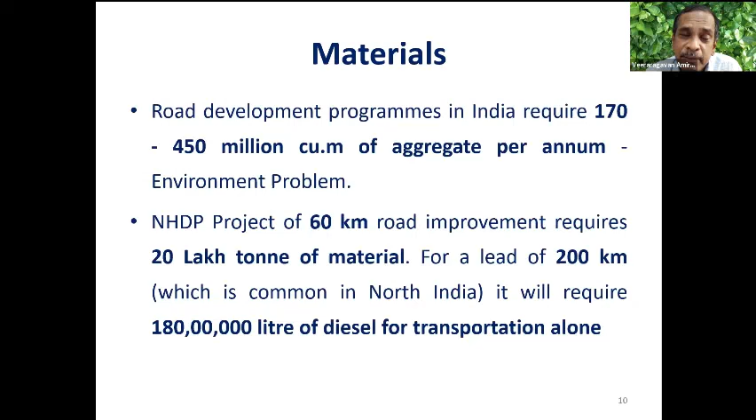Then you have to add both costs to work out the cost of the structure. There lies the major problem. What are sustainable pavements here? Sustainable in the system, in respect of pavement, refers to a system wherein you should be able to cater to the demands of the traffic above the desired serviceability level. What is the serviceability? What is that you want?

If you ask me, you will say, I want a good riding surface. You should be comfortable. It should be safe. That's all you will tell. You will not tell whether I need a bituminous pavement, a concrete pavement, or composite pavement. What we need as a performance is that quantified in terms of riding quality, in terms of safety, in terms of comfort. That's all finally we look at it.

But this requirement is not only for the day you open the road to traffic, but for our design life, which can be 15 years, 20 years, or 30 years. When I want this pavement to last for 15 to 20 to 30 years, will it last?

There's a difference in pavement engineering, which you have to understand, between any other structure. A structure may last for 100 years. A bridge may last for 100 years. But will a pavement last for 100 years? Never. Why? Because of several complications involved in materials, design, construction, operation, maintenance, and management.

I think the pavement is one which is abused by all road users. In spite of the fact that it's being used, overused by different vehicles, it has to give a smooth riding surface. How to do that? What are the different parameters that influence the performance?

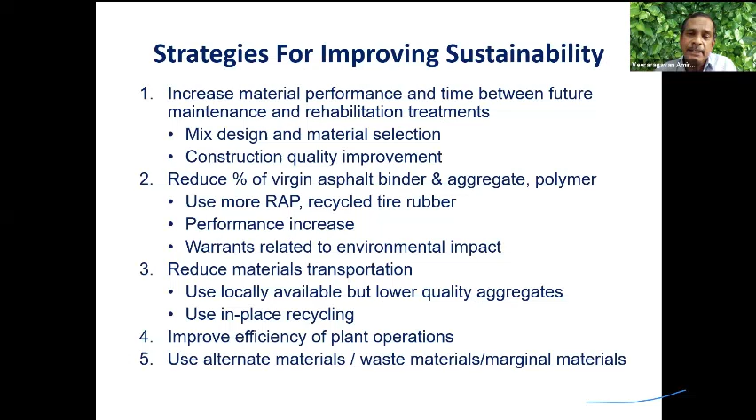There is a need for bringing in new machinery, new equipment. There are large quantities of waste materials available, alternate materials available, marginal materials available. I think it's time that we look at all this material when we talk about sustainability, and always make sure that the pavement performance is not compromised in any case.

I can claim that I have used waste plastics in road construction. I can say that I have used fly ash. I can say I have used steel slag. I can say that I have used polymer. But will it guarantee you satisfactory performance? That is the million dollar question that has to be answered.

If you are a designer, will you stand guarantee with the contractor saying that your design will work? We may or may not be. That's where we are at the crossroads today.

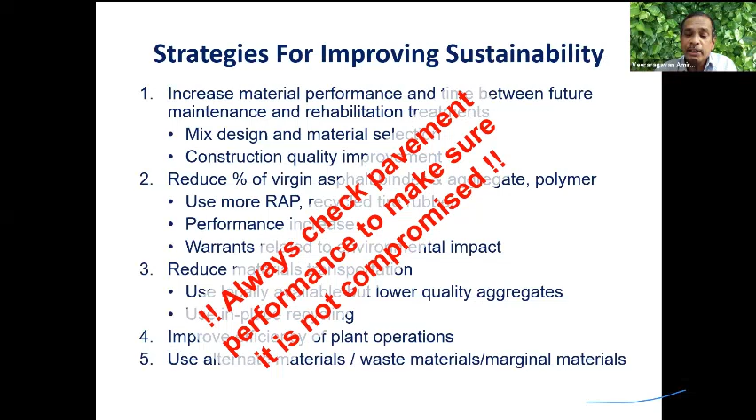So sustainable road infrastructure should consider stabilize and upgrade. For example, I feel that should be the order of the day. Any soil can be stabilized. Will improved soils upgrade improve the performance?

Yes. Will it reduce the thickness? Yes. Will it reduce the maintenance cost? Yes. Then why are you not doing it? It's not mandatory, but again, when you talk about sustainable infrastructure, it's time that we look at soil stabilization.

It can be mechanical, it can be chemical, it can be used as any other stabilizer. Naturally occurring stabilizers are also possible.

Second, when you talk about bituminous pavement, the pavement is subjected to repeated application and a lot of fatigue effect. This pavement should not develop a crack. How to make it more elastic?

If it's more elastic and subjected to repeated load, there will be rutting forming. At the same time, if you make it stiff, it will crack. So how to balance between rutting and cracking is another issue that has to be ensured.

Thirdly, what we find is that most of the pavements constructed in the last 20 years, when exposed to atmosphere, the volatile matter in the bitumen will evaporate, the material will become hard, stiff, and start developing cracks. Once cracks develop, water will enter. Water is enemy number 1, enemy number 2, enemy number 3.

Once the water enters into the pavement, it will strip out the material, lower the strength of the bottom layers, and cause several deformation, deterioration, and rutting of the pavement. We can also use new materials like foamed bitumen and emulsion, which are environmentally friendly. We can use reclaimed asphalt pavement materials.

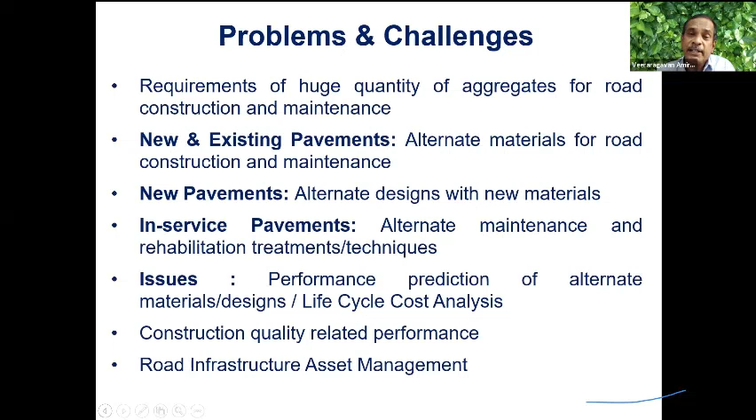How do we do it? That's the question. To start with the new material, the pavement that we are constructing can either be a bituminous pavement, or it can be composite pavement, or it can be concrete pavement. I posed a question. When I want to construct an expressway between Chennai and Bangalore, should it be a bituminous pavement? Should it be a composite pavement or an inverted pavement? I will show what it is. Or should it be a concrete pavement?

So today, in the present scenario, what we do is that any agency for that matter, either Karnataka Road Development Corporation or PWD or National Highways or State Highways, they will tender it. I want to construct a road. There are contractors who bid for the work. Whoever quotes the lowest, L1, will be awarded the work.

The question which I'm posing at this point of time is, is that sustainable? How many years will it last? If I want to have a design life of 30 years, how many times the pavement has to be maintained? What is the maintenance cost? Do we have a material for the maintenance? These are other questions that are to be answered.

There are several factors that are to be considered, like engineering factors, material availability, equipment availability. You have to work out the life cycle cost of alternate designs and take sustainability into consideration. But unfortunately, in the present system of awarding tenders, we don't consider the issue of sustainability.

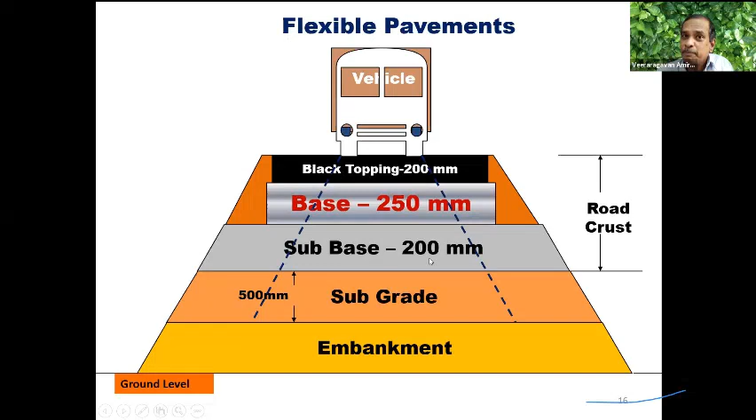Again, this base course costs 250. Can I reduce it? Yes, you can. Sub-base costs 200. Can you reduce it? Yes, I can. That is where sustainability comes into picture. That's where your challenge starts.

What should be the design? The basic principle of pavement design is that we talk about the vertical compressive strain on top of the subgrade, and the radial tensile strain at the bottom of the bituminous layer. This causes bottom-up cracking, the fatigue crack, and this results in rutting of the pavement when it becomes excessive. In a nutshell, your design should be such that this strain value should be within the allowable limit during the entire design life so that cracks do not form, and this vertical compressive strain should be within the allowable limit so that no rutting will form.

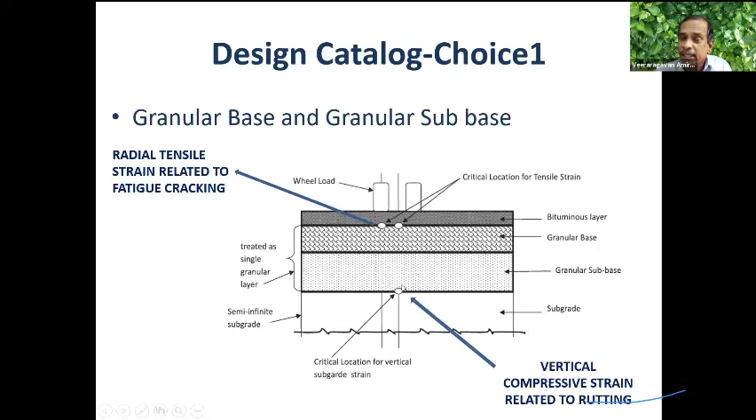How to do that? What are the alternate designs? Normally we require about 200 millimeter of granular sub-base, 250 millimeter of a base course, and 200 millimeter of a bituminous layer. When you have these layers in a pavement system, instead of reducing the thickness, I can have a cement treated base. In the earlier case, I talked about a granular base. Now I have a cement treated base. You can find the thickness of the bituminous layer come down from 200 millimeter to 50 to 75.

We express the traffic in terms of million standard axles in the pavement design. A highly traveled highway can carry up to 150, 200, 300 million standard axles during the design life of 15 years.

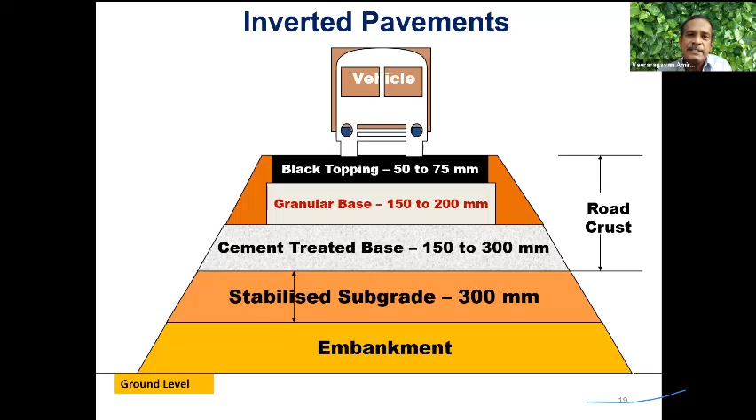But majority of the roads in the country do not carry 150 million standard axles. When I want to construct a pavement, I want to ensure that the maintenance requirements are minimum and performance is good. That is possible by adopting this inverted pavement or a composite pavement.

So what we thought is in the IRC 37, we introduced new choice designs with a new design where I introduce a cement treated sub base and a cement treated base.

At the same time, as a civil engineer, you should know the problem, and you should also know the solution. What is the problem? Any cementitious layer, I'm calling it cementitious layer, is likely to crack. When this layer cracks, the crack will propagate to the upper layers.

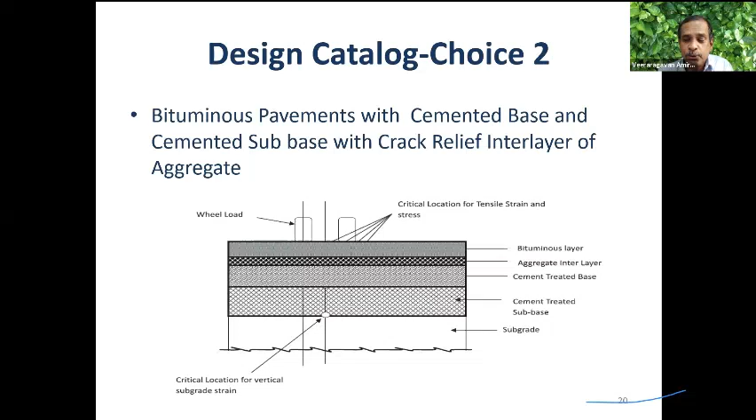Due to repeated application of loads, one truck may be 8 tons, next may be 10 tons, third may be 20 tons, fourth may be 30 tons, which cannot be predicted. We remember the design is for considering 8.2 tons as the design axle load, but trucks carry 10, 20, 30, 40 tons as well. When there's repeated application of axle loads, the pavement will crack.

With repeated application, it started developing cracking. Today, maybe at the end of 5 years, 8 years, 10 years, it will reach a stage of granular state. The modulus of the cementitious layer, which was 5,000 initially, will become 1,000 later.

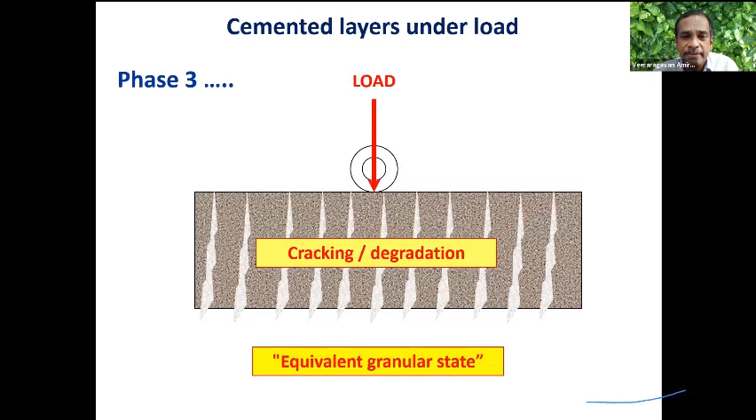How do you consider that in the design? That is the challenge before you. How many years will it reach for a pavement to reach a granular state in terms of modulus? What is to be done? I can prevent these cracks from reflecting on the top.

I can have a crushed stone base as a cushioning layer above, which will prevent the crack from propagating to the bituminous layer. That is called a crack prevention layer.

So as a civil engineer, you may do a PhD on a cement treated base, but you should know how to use it in a pavement system. What are the implications? What are the causes, pros and cons? Definitely it will crack. You should take precautions when you do this.

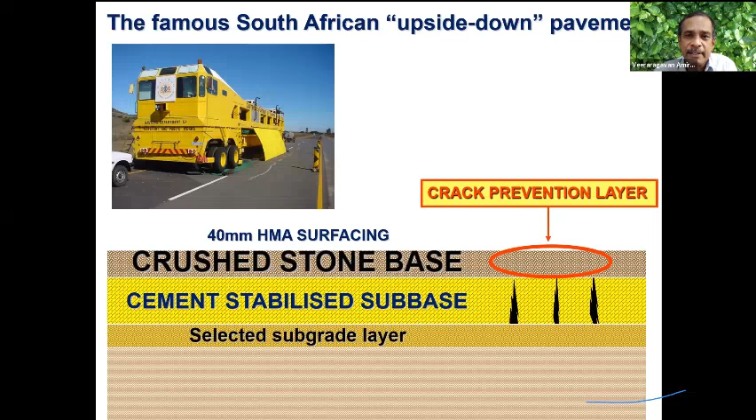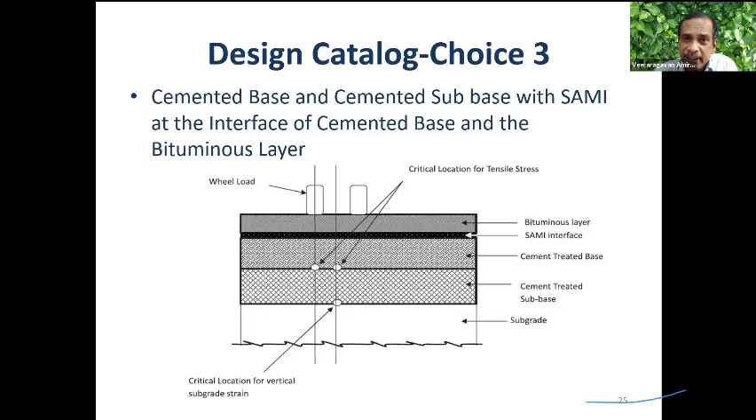We brought in another catalog wherein cement treated sub-base, cement treated base is having a granular layer, which I showed in the earlier case. We can have bitumen impregnated geosynthetic called a SAMI layer, stress absorbing membrane interlayer, which will again retard the crack from propagating to the top.

I can have reclaimed asphalt pavement materials. Again, I'll take you up what is the RAP material. You can have another catalog for a granular sub-base, cemented treated base, and aggregate layer. And I can also have cemented bases with wet mix macadam.

So what I want to bring in at this point, showing all the 6 catalogs, is that pavement design is not one design. You have different options for the design. But the challenge before you is to tell how to characterize the material used in different layers, use that material property in the design, predict the performance, identify in which year it will warrant maintenance, and in a nutshell, what will be the life cycle cost. That is the first challenge before you.

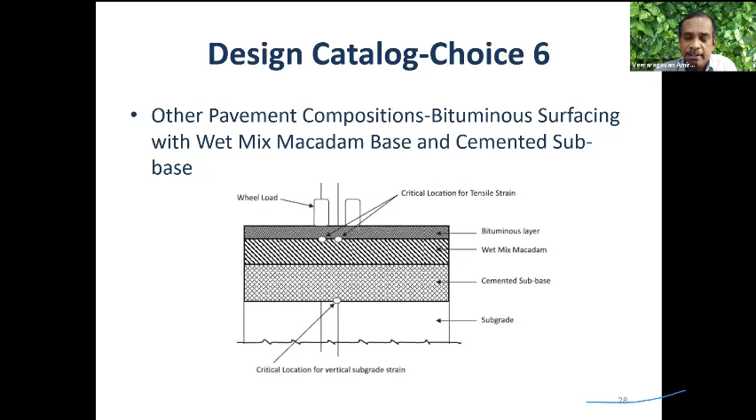I can go in for a concrete pavement. Again, it will have a base course and a sub-base. Why are you not going for a concrete pavement? Don't go for concrete pavement because cost is high. How much high? Is the life cycle cost lower? Yes, the cost is lower. But I don't prefer a concrete pavement because of the fact the initial cost is more.

How much more? Today, I can give you a design wherein the initial cost difference between a bituminous pavement and a concrete pavement can only be 20% more. It doesn't warrant maintenance for 30 years. But there are issues and concerns here.

There are different types of concrete pavement as well. It's not one design I was talking about. It can be jointed plain cement concrete pavement, continuously reinforced concrete pavement, fiber reinforced concrete pavement, or precast concrete pavement. There are a number of types again as well. It can be even jointed as well.

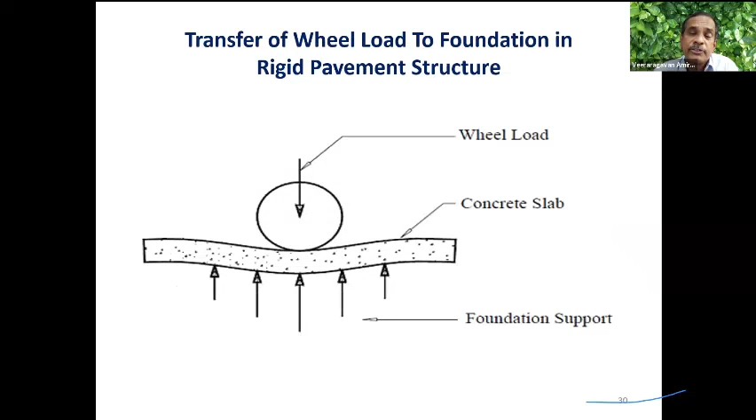But the load transfer mechanism is different. It requires lesser thickness. It takes the load by the slab action. With the result, even when the soil is poor, we can go in for a concrete pavement, which will last longer.

But at the same time, we need sustainable materials - materials which will have a higher modulus. With conventional aggregate, the thickness requirement is 250 millimeter for a subbase, 300 millimeter for a base course. Can I reduce thickness? Yes, possible with such materials. I need a high modulus base. What is that high modulus base? Again, an area for research.

As mentioned by the Vice Chancellor, polymers are available. Using a polymer, we can develop a high modulus base. If I use a high modulus base, thickness can be reduced and performance can be improved - another area for research. It will withstand repeated applications of strains and not crack. How much more repetition can it take? Again, an area for research. How much will be the thickness reduction? Again, another area for research.

So these are the new areas of research which you should learn by attending such training programs. Because I'm reducing the maintenance requirement, pollution levels are decreasing. Can I count this in the project evaluation alternate design? Yes, that is what is required. Will there be savings in cost? Yes, there is saving in cost. How much? That has to be quantified.

We can use the milled material again and again. What is the percentage of milled material that I can mix with virgin material before I use it in reconstruction? Simple technique: reduce, reuse, and recycle. That is what we are now moving around. But again, the civil engineer has got a different role in characterizing the material.

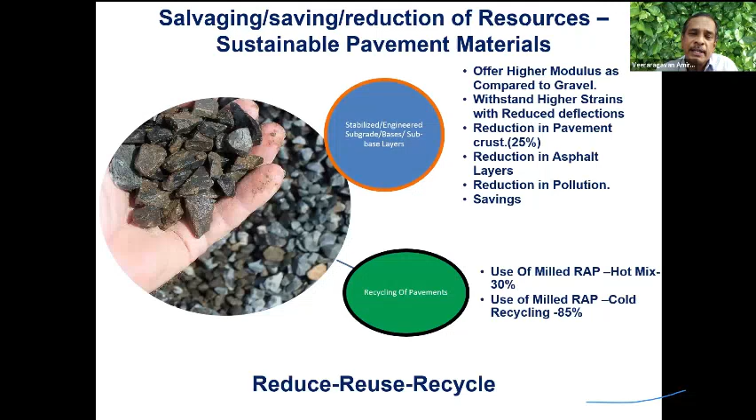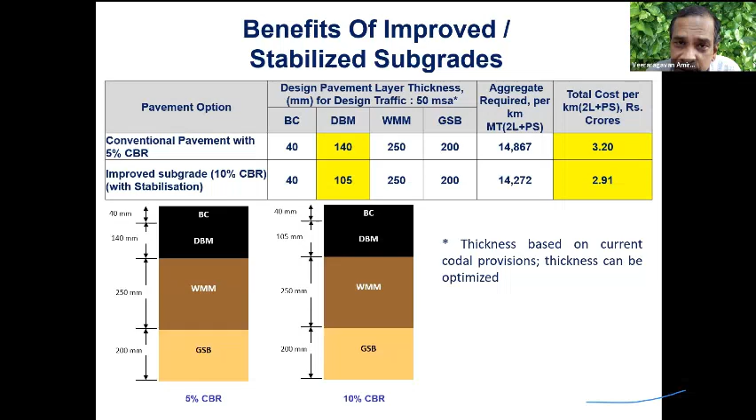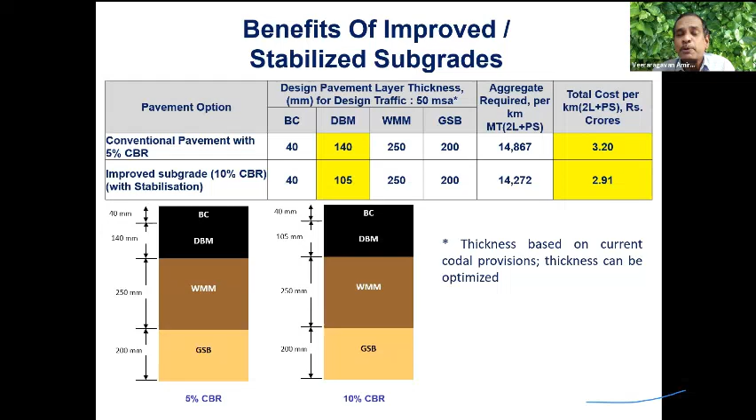Even in the case of lower volume roads, if having waterbound macadam with a granular base, I can mill the material and stabilize it with a stabilizer. You'll find that from 2,365 cubic meter of aggregates, I can bring it down to 252 cubic meter. There's a significant reduction in cost possible.

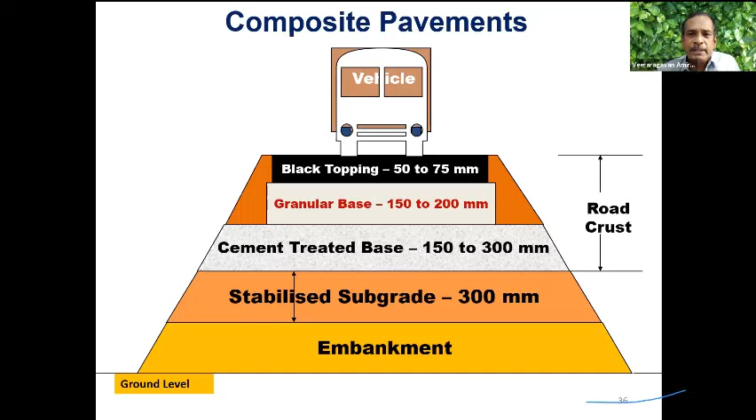Therefore, if you talk about sustainable practices in civil engineering road construction, the simple solution is to adopt stabilized subgrade, stabilized subbase, stabilized base courses. A road which was like this can be made good like this by introducing stabilized pavement layers. Look at the composite pavement or inverted pavement - you will find that I can reduce the thickness of bituminous layers to 50 to 75.

When you talk about the different designs possible, you'll find that instead of having a granular subbase, I can have a cement-treated subbase. I can have a cement-treated base. I can have a granular subbase and cement-treated base. Now, as a civil engineer, you have to quantify what is the virgin aggregate consumption required for all these 4 different types.

You should be able to predict how they will perform. You should be able to predict what is the maintenance requirement in terms of aggregate consumption, in terms of road user cost because of bad roads, in terms of life cycle cost. And there lies the challenge in terms of sustainability.

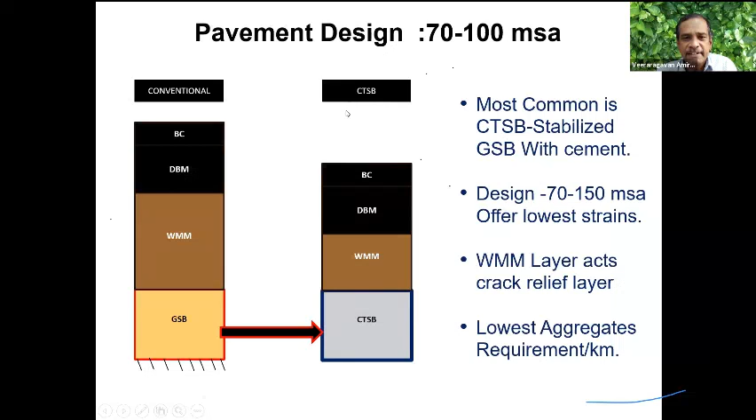We can look at the most common solution: cement treated subbase. Instead of granular subbase, go for cement treated subbase. For a design life of 70 to 150 MSA, the wet mix macadam which I'm providing here acts as a crack relieving layer - this crack will propagate to the top. So you should know the problem, you should know the solution. But you can find the thickness reduction is significant. It's possible here - I can quantify and show it.

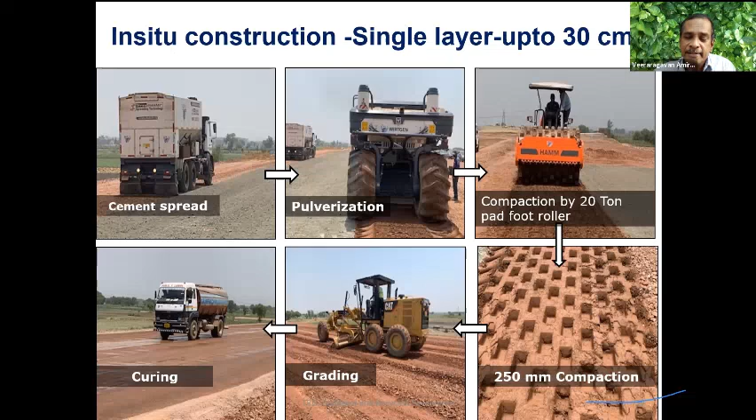So what I do here is use cement, which is a well-known product. I don't require a huge quantity of cement - 2%, 3%, 4% may be adequate. You spread the cement, pulverize the material, compact it in layers, grade it and cure it over. You can reduce the thickness from 250 millimeter to 150 millimeter. You can now work out the savings in aggregate. It will definitely result in improved performance as well.

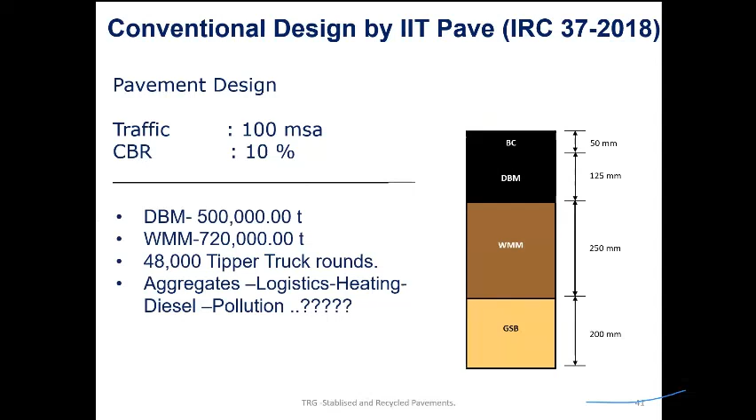This is for a project in NH 344A for a 10% CBR and 100 million standard axles. They worked out the cost of the pavement layers, and found that having a dense bituminous macadam of 5 lakh tons, we can bring down, and a wet mix macadam of 7.2 lakh tons.

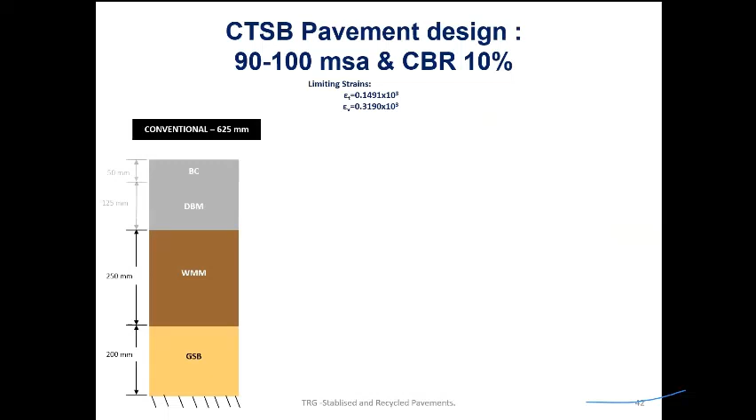We can bring down the pavement thickness significantly by adopting a cement treated base. You find that the benefits of adopting the new material are in terms of reduced thickness. You can find the thickness drastically reduces.

Strain values have to be checked. If you want to check the strain values, you need the material property - what is the modulus, and what is the change in modulus during the design life. This will enable you to work out alternate designs.

This method of design is called mechanistic empirical design, wherein I compute the stresses and strains of the pavement layers. I relate these strains to the performance in terms of rutting and cracking. There are allowable strain values, and this again has to be cross-checked.

Certainly, 22% reduction in thickness is possible. You can find that savings in the quantity of aggregates is of the order of nearly 60 lakh rupees. In the case of cement treated subbase, nearly 27 lakh rupees. Nearly 6 million rupees savings per kilometer is possible by adopting alternate design.

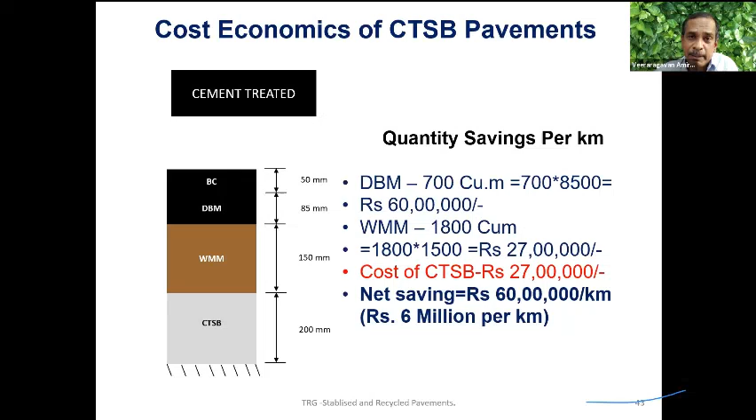Now you have no choice. For sustainable practice, you don't have the luxury of having the thicknesses which I showed earlier. We have to cut the leg to the shoe size - with the available material, how do I design the pavement? So now civil engineers are in great demand to come out with alternate designs.

You can find that savings in cost is nearly 60 lakh, or 6 million rupees per kilometer. You can work out and check what are the benefits.

If you want to use the material again and again, recycling is one of several alternatives available today. A pavement condition starts deteriorating from the day it is open to traffic - it becomes very good, good, fair, poor, very poor. When the pavement reaches sometime during good and fair, I can mill the material, recycle it, and rejuvenate the pavement so that the performance is really much, much better.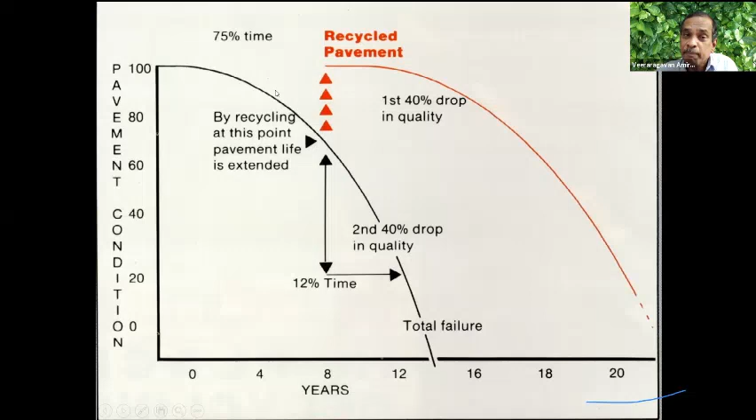This question of recycling can be done by different approaches. Whenever you find the riding comfort is not good, there's excessive distress in the pavement, reduced friction, large maintenance cost, road user cost is higher because of the bad roads, or structural capacity of the pavement is inadequate, you can go in for recycling. You have to select the recycling method.

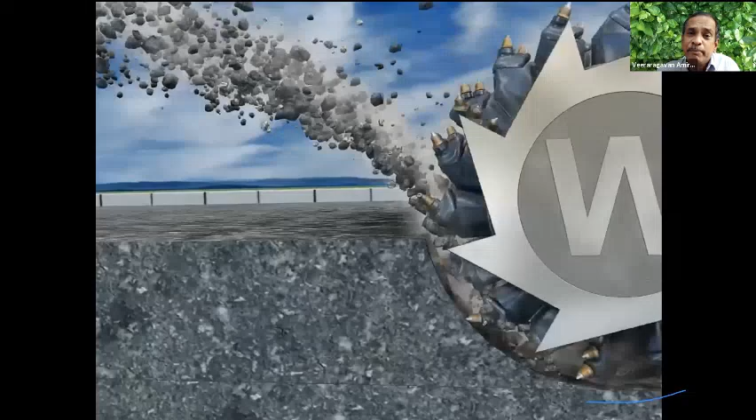What I'm trying to do is mill the material which has already been buried. Conventionally, what you do is provide an overlay at the top - I don't want to do that. I want to mill the material and reuse it again. When I mill and reuse the material, this milled material will have aged bitumen and aggregates. We can rejuvenate the material and use it again.

There are 4 different types - 2 broad types, hot recycling and cold recycling. Again, it can be in-place recycling or central plant recycling. There can also be full depth reclamation. The civil engineer has to decide which is the most appropriate method, which is sustainable. That's where the challenge is.

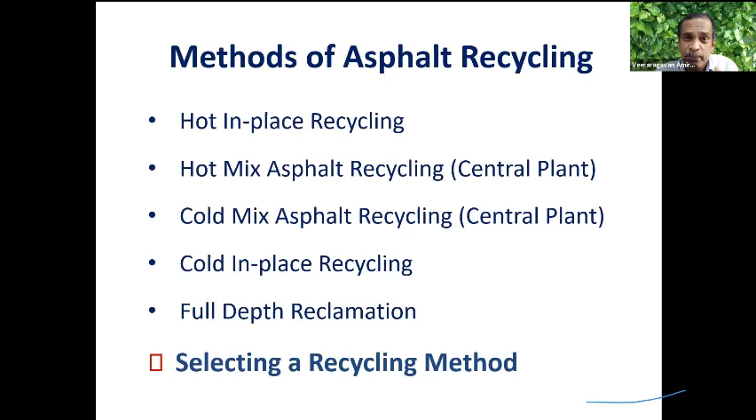Not just design, but you should be able to predict the performance and quantify the benefit of the new design and new materials. Hot mix asphalt can be used when there are surface defects, as I was mentioning - top-down cracking, deformation, cracks. But how much milled material, which I showed in a video, can be used? That again depends upon limitations of the plant.

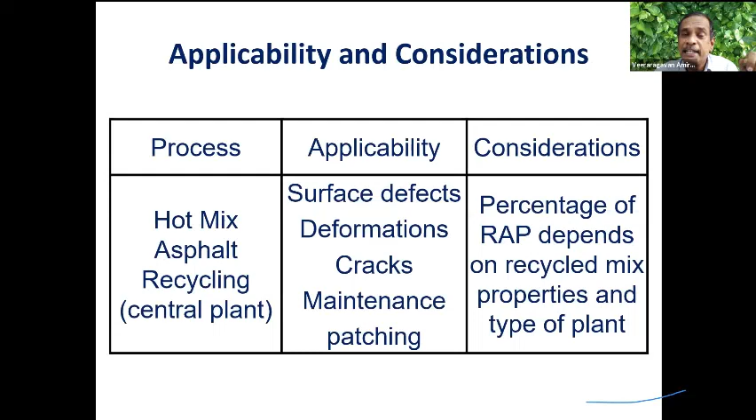In the case of a hot mix drum mix plant, we inject the virgin aggregate into a drum mix and use the reclaimed asphalt pavement material here. This is already aged - I don't want to heat it again. So this aggregate will first be heated, and this hot aggregate will in turn heat the RAP. Unless this is 70%, it will not be able to heat this 30% material. Therefore, considering the plant limitation, we do not permit more than 30% of RAP.

But I have 100% RAP - how do I use it? That is the question, and that's again a research need. How do I characterize the reclaimed asphalt pavement material such that 100% can be used in a recycled mix? That's a challenge, again, an area for research.

What rejuvenator do you use? How do you rejuvenate the material? Will the aged binder be made good like a virgin binder? This again is another area for research.

Now double barrel drums are available. When I don't heat the RAP material, I inject the material into the drum. There's an inner drum and an outer shell, another drum, the outer drum. This material gets heated and goes to the outer drum after adding the bitumen. In the outer shell, you add the RAP. With the result, I can increase the percentage of RAP, which was 30% in the earlier case.

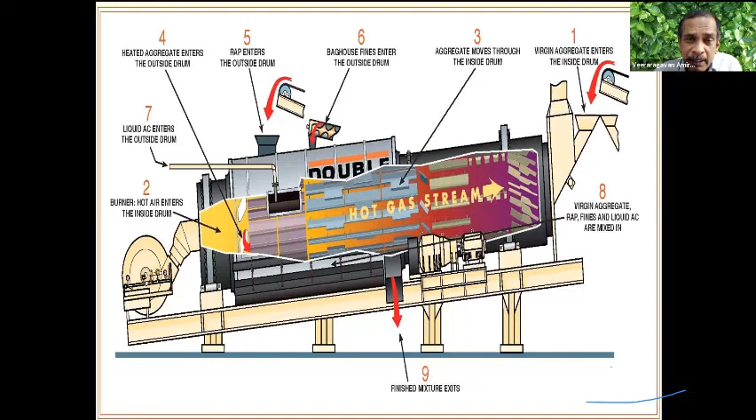I can increase to a higher percentage, but how many plants are available in the country? What are the cost implications? This, again, you have to study.

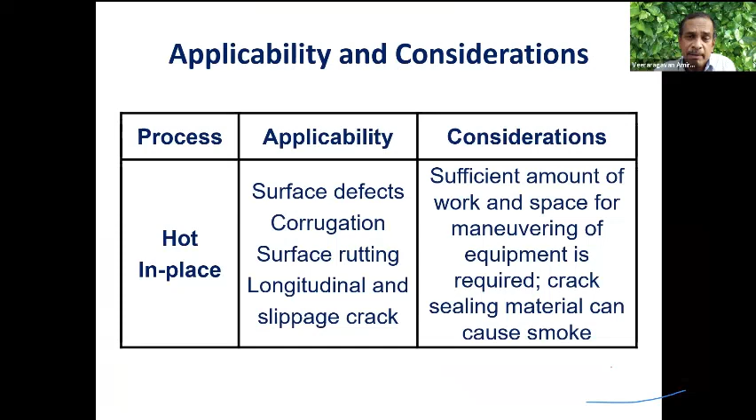I can use 100% material as an in-place recycle. When there are corrugations, surface rutting, longitudinal slippage cracks, I can mill the entire material, add virgin material in a smaller quantity, recycle, and relay it back.

What I try to do here is like an equipment train. I heat the material, then I mill it, mix it with the virgin aggregate, and pave it back. So it's all in one operation: a heater, a scarifier, and a pug mill, and the material is laid. So when the equipment train moves by one kilometer, you have a newly laid pavement.

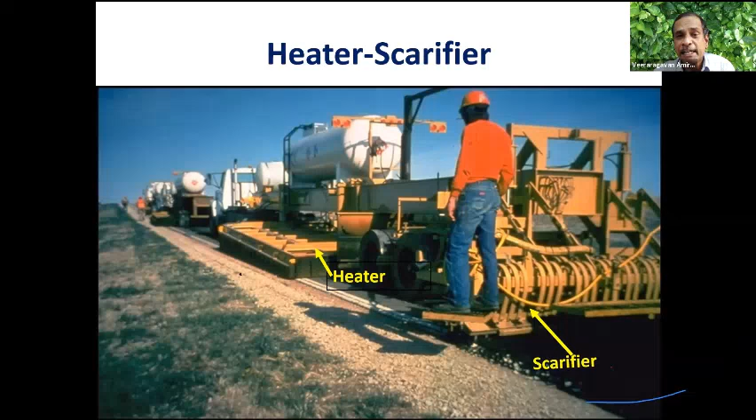Again, characterizing the material used, designing the mix, and thirdly, designing the pavement with this reclaimed asphalt material, predicting the performance is going to be a challenge.

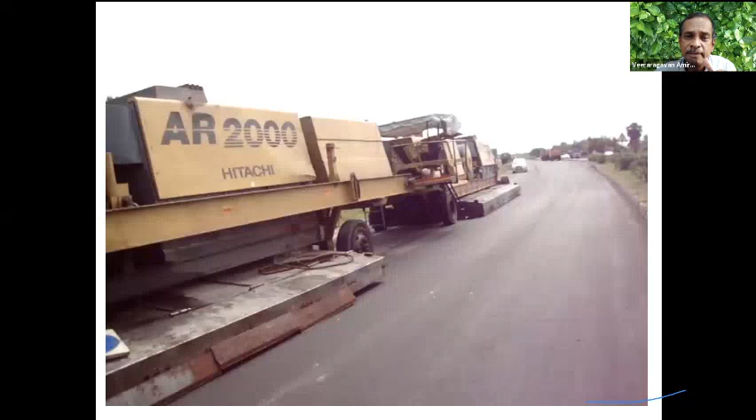So if your distresses are confined only to the top 50 millimeters, you can mill after heating it first. The milled material will have lumps, and fines will be missing, so you add the fines, and then lay it back. So hot in-place recycling also becomes an alternative before you, to rejuvenate and recycle the material.

It's possible to go in for environmentally friendly cold mix. Again, it can be done as central mix. Wherever the lower layers are deteriorated, I can mill the entire material, add a virgin mix, add an emulsion or foam bitumen, and then use it again.

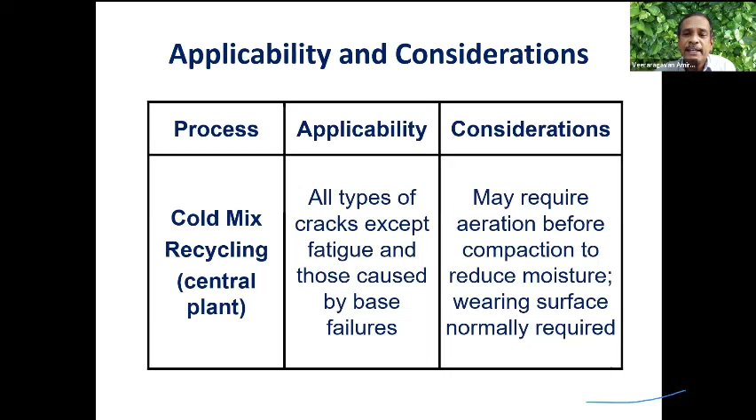I can also do cold in-place recycling. In a central plant, I mill the material, add virgin binder, recycle, and lay it back. I'll show you in a video clipping.

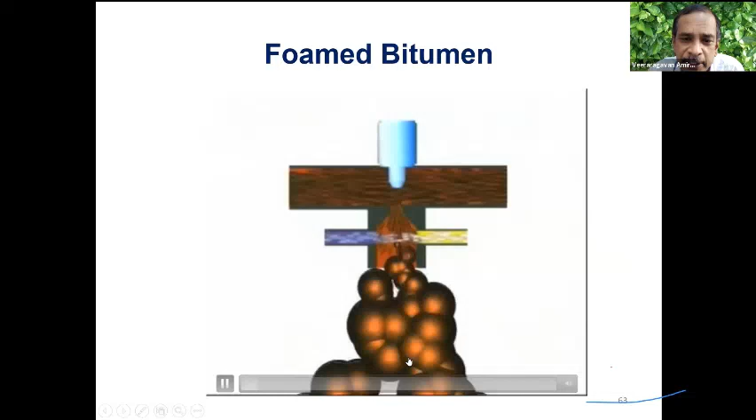This is what is called foamed bitumen. To the hot bitumen, I inject water and air. The bitumen foams. When the bitumen foams and we add it to the milled material, it mixes with the material being milled, and it's laid. Now you get an excellent base course, which is much, much better than a conventional granular base.

So I have rejuvenated the material, I have reused the material, I have reduced the virgin aggregate consumption, and I have given a new life to the aged asphalt. As a result, we found that the pavement can last longer.

I did this for the first time on the Chennai-Tada Highway, NH5, near IIT Madras, in the year 2011. Ten years old now, NH5, no maintenance, no rehabilitation, and even today it's working fine.

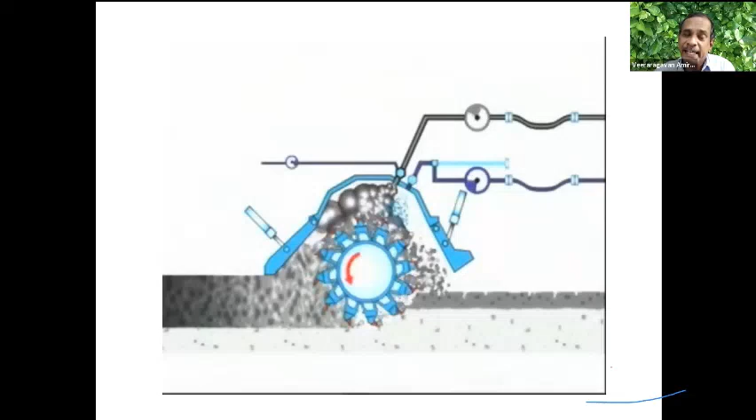Based on the experience which I gained, we developed a code, IRC 120, a new code based on the experience that we gained by adopting the cold mix technology.

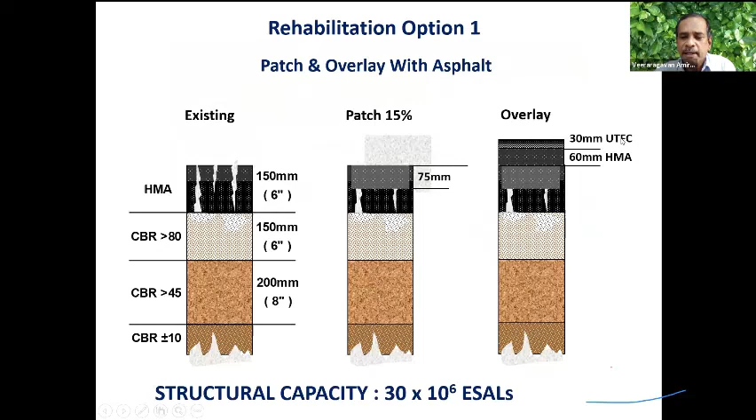So we can mill the material, patch it, or I can provide an overlay. Normally we provide an overlay like this, that's what's done across the country. But what will happen is this will develop a crack at the top. So what they do is provide an ultra-thin friction course for 30 million standard axles. Construction cost may be $30.

I can mill the cracked material. For the same traffic, I find this will cost nearly $45. I can do a stabilization, cement-treated base of the whole pavement layers, provide a granular layer, and provide a hot mix asphalt. This will cost $42.

So again, I was talking about different alternate methods of design. Now I'm showing before you different alternate methods of rehabilitation of a pavement. All will have different cost, and all will have a different performance.

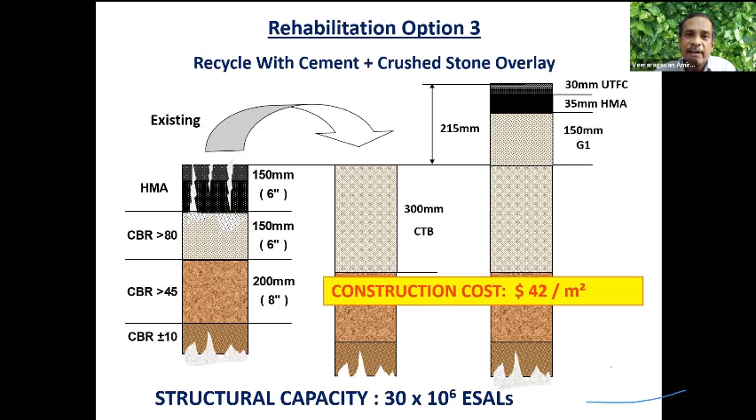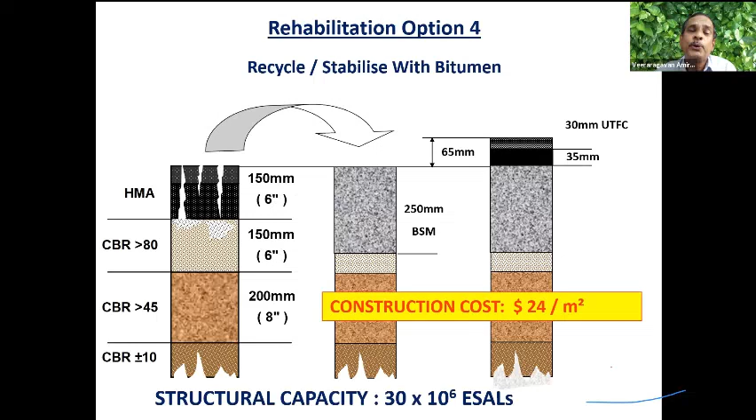I can also provide a thin layer of 35 millimeters, and you'll find the cost of this will be $24. Now civil engineers have to decide which technology to adopt for a bad road: stabilize, recycle, rejuvenate, hot mix, cold mix, in-plant, central plant—what should I do now? You have to tell the agency what is needed for sustainable infrastructure.

Looking at material and construction cost, the bitumen-stabilized material cold recycling is the lowest. When I look at the alternate rehabilitation costs, we find that recycling is the cheapest.

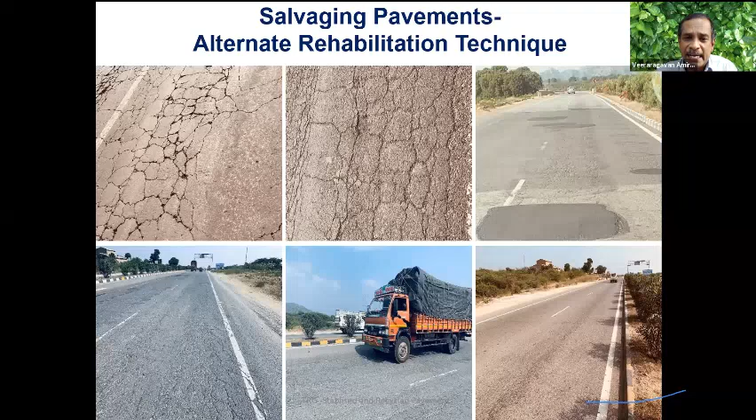When a pavement is like this, fully cracked, with heavily loaded trucks, what should I do now? You can mill the material. There will be lumps, and these mixes having lumps will not have fines. We need fines to ensure good stability and compaction.

Without damaging the lower layers, I have to mill. So the lumps are generally thrown away, but these are black gold—why throw it out? You can mill the material instead. Now milling machines are available in India. You can mill any thickness that you need: 5 millimeter, 10 millimeter, 30 millimeter, 50 millimeter, 100 millimeter, it can be milled.

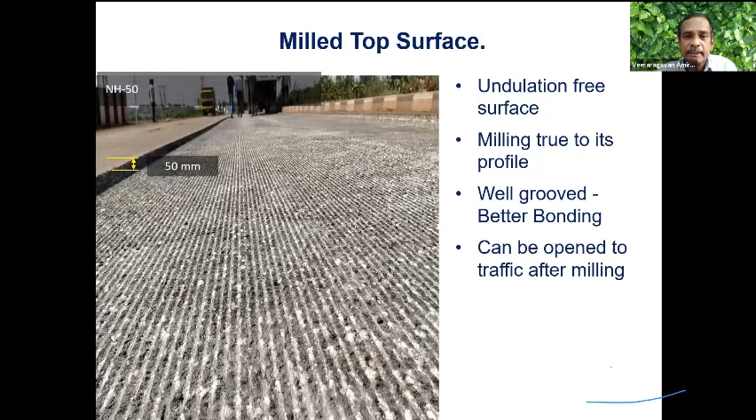This milled material is taken to a central plant. You can reuse them either 100% in cold in place recycling, or a higher or lower percentage in the case of hot in place recycling. If done well, you'll have better bonding, and no crack from the bottom layer will propagate to the top. So in rehabilitation, either I can mill the top layer alone, or mill the top layer and the base course as well.

This is called full depth reclamation. For sustainable pavement, I am rejuvenating the old, deteriorated pavement, adding only maybe 10% virgin material. I can use the whole bitumen layer, which may be 3% binder, 3.5% binder, and add only 1 to 1.5% binder. So I am reducing the cost, rejuvenating the pavement layers, and improving the performance.

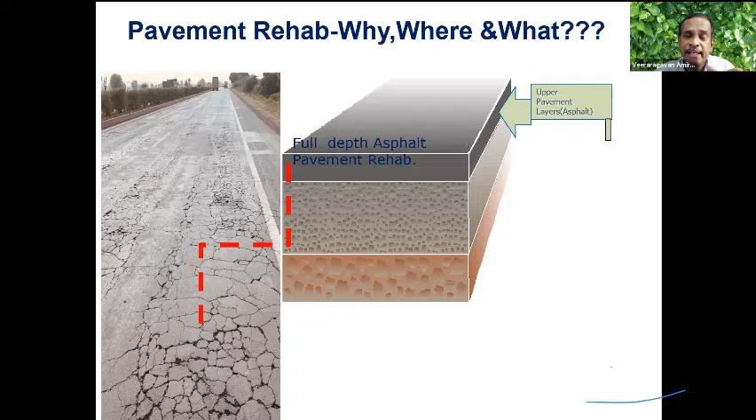So for sustainable infrastructure, the order of the day is to reduce, reuse, and recycle. We find that we can save a huge quantity of material. 100% recycling should be the order, but this depends on the research carried out as to how the material can be characterized, designed, and constructed.

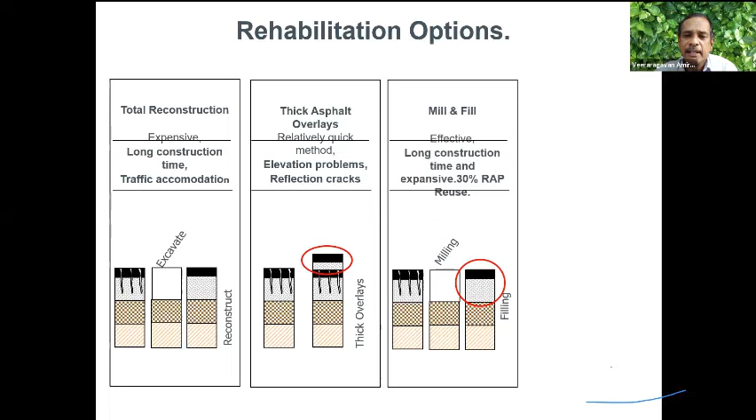So there are different rehabilitation options before you. When you find a thin layer, the crack will propagate as a reflection crack. Up to 30% RAP is possible in hot recycling, but when you want cold recycling, 100% of the material can be recycled. There are different options before you, even for recycling.

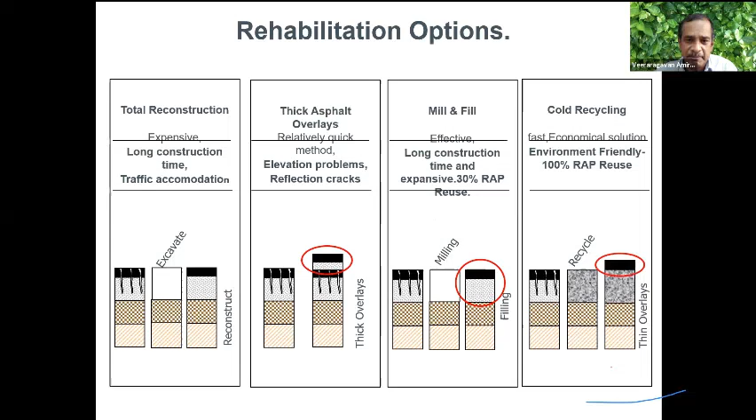A number of projects have been taken up in the country—I think several hundred kilometers are being recycled and reconstructed. This again, a highway—it's a shame to say a highway failed, but this highway failed in 3 months, out of spending 2,400 crores. It failed, it cracked. There are several reasons for that.

I also investigated the failure and gave a solution. My solution cost 130 crores. The agency did not want to do that because they said my cost is higher. They delayed and delayed and delayed. Today, the cost of rehabilitation is 450 crores, just for repair and rehabilitation again. Will it last? How long will it last? This is the challenge before you.

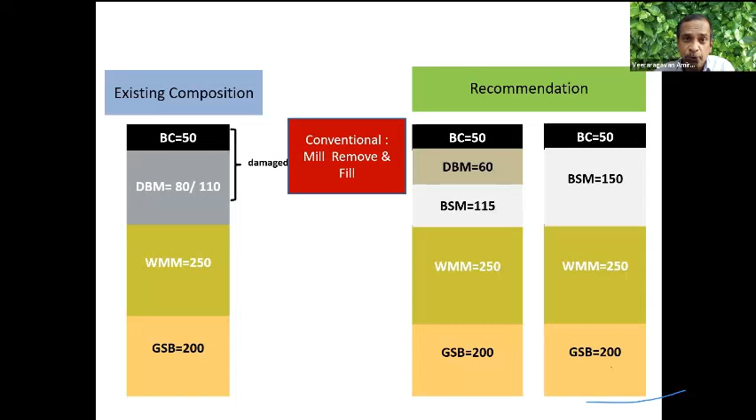We find that total overall cost is nearly 900 million rupees, 90 crore rupees, by adopting cold recycling with a bituminous concrete layer of 50 BC. So we never teach all this to students. I think it's time that we teach all this to students so that they will think differently—they can be entrepreneurs in adopting and bringing in this new technology in road construction.

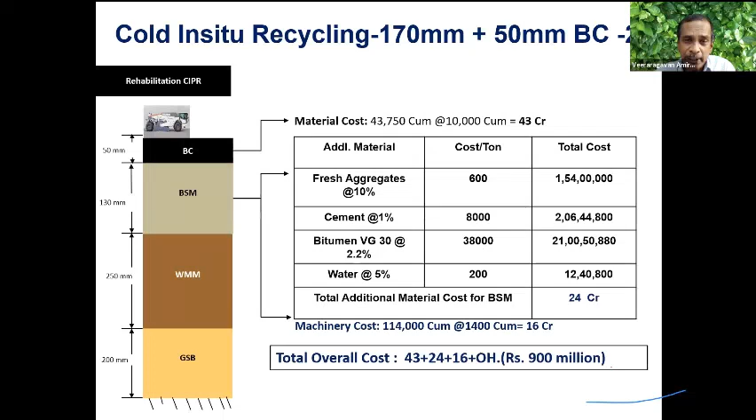We find that overall, for a 50 kilometer 4-lane highway, the savings is of the order of around 200 million rupees, nearly 18% saving is possible. But I am talking only about savings in construction material cost—I am not talking about the environmental benefits that this brings in. That's again an issue that has to be addressed.

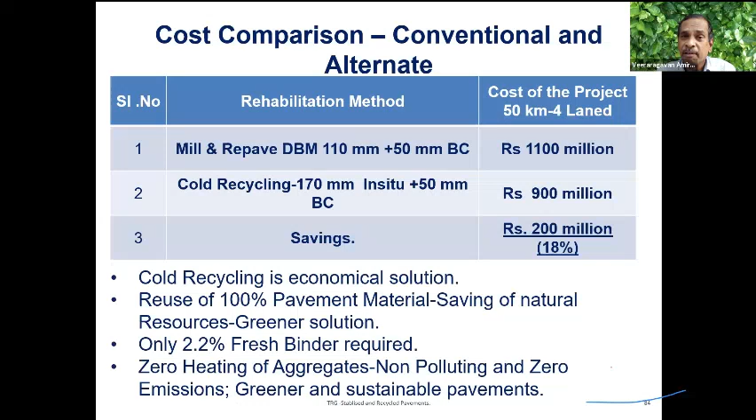Cold recycling can be used, 100% recycling is possible. We don't require solid waste disposal, which is a major problem in the country. There is 90% reduction in transport volume, nearly 90% reduction in resource consumption, 50% reduction in binder usage, 50% shorter construction period, and 50% reduction in overall cost. So that is the sustainable technology that has to be adopted.

I think it's time that we also look at outdated materials. I think it's time we look at geosynthetics—I'm a fan of geosynthetic materials. These geocells can be effectively used; I have demonstrated that they can be effectively used. They are UV stabilized with carbon black.

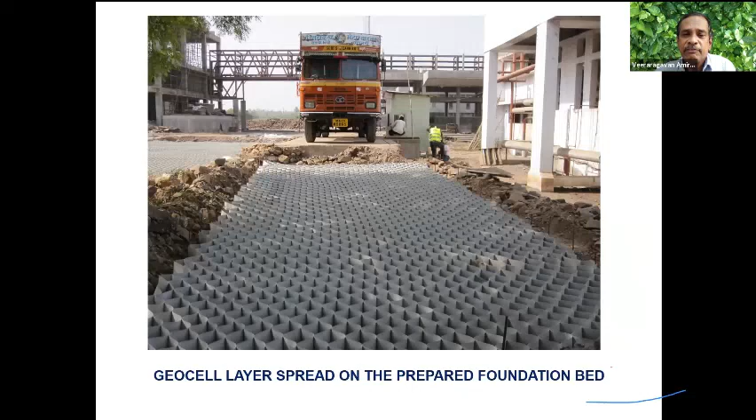What are the benefits? I did a project for a typical project in Maharashtra. Geocell can be stretched, laid, and filled with aggregates. What are the benefits? By adopting this geocell in the granular layer, if I have a thickness of 975 millimeter, and I use a geocell as a subgrade, I can bring down the thickness from 975 to 735.

If I use it in the base and subgrade, I can bring down thickness to 520. If I use in the base course, I can bring down to 865. This lasts only 100 million standard axles, this can last for 150. If this costs 2,635 rupees per square meter, this costs only 2,450.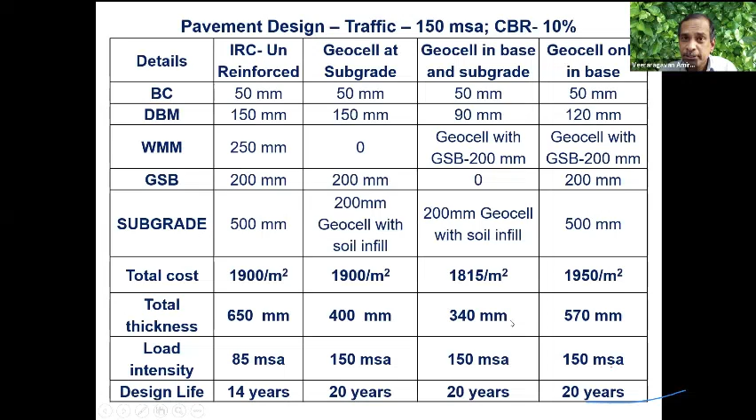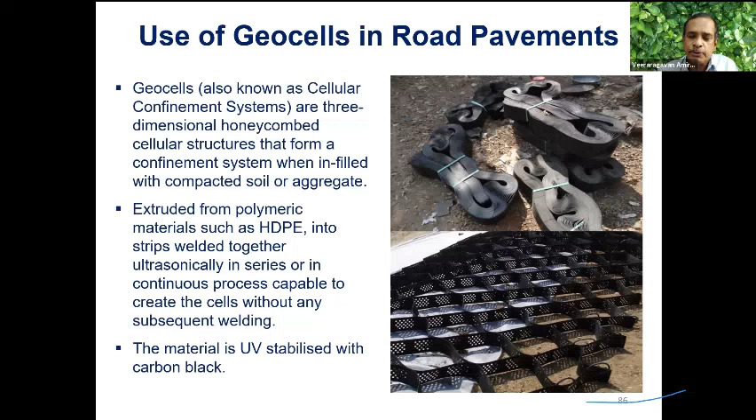Not only for a low CBR, even for a high CBR, instead of having 650 millimeter, I can bring down thickness to 340 using geocells. They provide the confinement you need. There are perforations, this enables drainage, so subsurface drainage is possible. Instead of having 250 millimeter for granular subbase, you can bring down thickness to 100 millimeter, maximum 150 millimeter. It enables the water to get out. Confinement is there, significant reduction in thickness, improved performance, and lower life cycle cost.

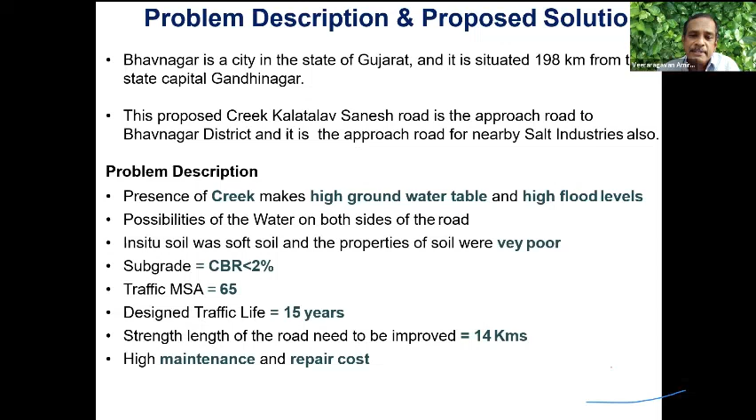It's time that we look at the new materials. This is again a case of a project road in Bhavnagar. The soil here has a high water table, high flood level. Soil had a CBR less than 2%. Traffic was 65 million standard axles, 15 years design life. That was the soil, now you have to construct a sustainable pavement here.

These are the initial construction. So what is to be done here? The sustained solution is to take care of the confinement, take care of the reinforcement, take care of drainage. All this is possible by having an extruded geogrid here, a drainage composite here, a road mesh here. So by using non-woven geotextiles, extruded geogrid, drainage composite, and road mesh, I can bring down the cost, improve the performance, and reduce the life cycle cost.

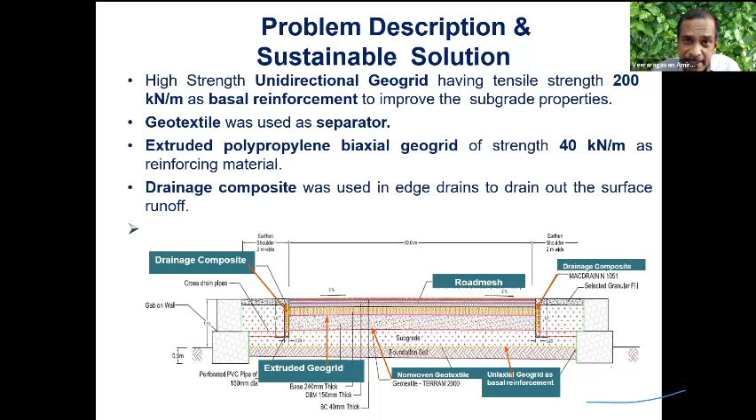Therefore, sustainable road infrastructure means adopting new materials and new technologies. Even in the case of low volume roads, we have started adopting coir and jute. It has got different functions of separation, filtration, drainage, and reinforcement. One of my students, she will submit her report today or tomorrow. We find that the thickness of the layers can be reduced significantly by using coir.

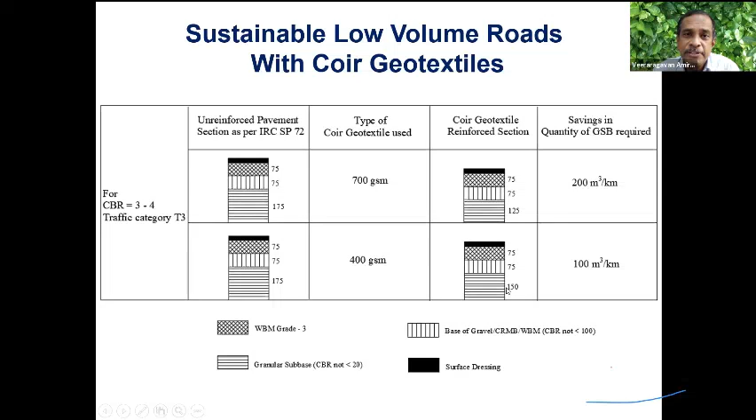If I use 700 GSM, I can bring in a savings in quantity of 200 cubic meter per kilometer. If I use 400 GSM, I can bring in a savings of 100 cubic meter per kilometer. The thickness can be brought down. Instead of having 175, I can bring that to 125. Instead of having 175, I can bring that to 150. So significant reduction in aggregate is possible, improved performance, lower life cycle cost. It can also be used for erosion control.

Concrete pavement again can be used, definitely lower rate of deterioration, longer life, lower life cycle cost, lower thickness, good night visibility. But under overload conditions, again an issue arises, as how to design a concrete pavement to withstand the repeated application of traffic loads. Stage construction is not possible, or it may get polished, it may warrant diamond grinding. Utility cuts, they say not possible, but now it is possible here.

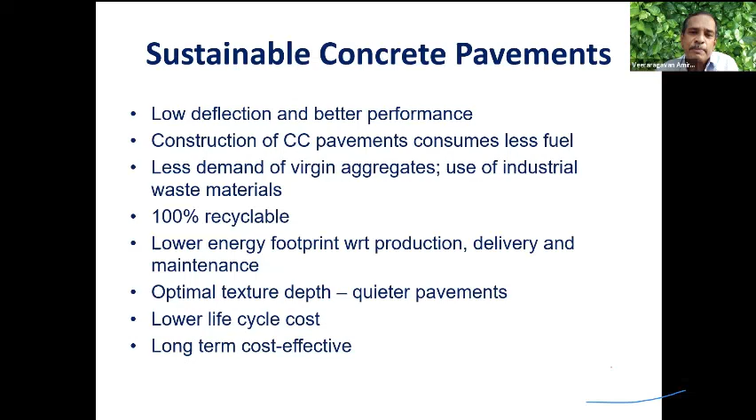I think sustainability, if you talk about concrete pavement, is sustainable when compared to any other bituminous pavement. Low deflection, less fuel, 100% recyclable, low energy footprint with respect to production, delivery, and maintenance, optimal texture depth, lower life cycle cost. Therefore, sustainable civil road infrastructure is a concrete pavement. It can be adopted for all categories of roads, from rural roads to highways. Right, the technology that we have to move into should be a precast concrete pavement.

I think this is something you should teach and you should practice. We are trying to bring this technology to Bangalore. Maybe sooner or later we will be able to come out with it. We have started developing this technology. According to me, today the road should not be there, and tomorrow morning when you come, there should be a concrete pavement. Is it possible? It's quite possible.

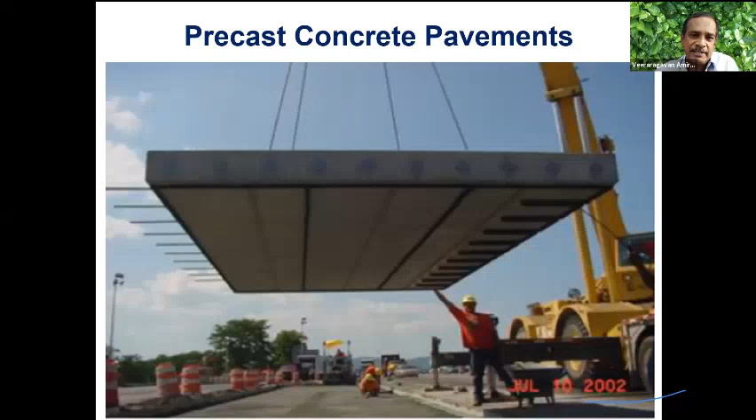So this concrete pavement can be cast elsewhere in a yard, cured perfectly, brought to the site, and then assembled back. It can be post-tensioned on the site. The road is being constructed in Nagpur today. But there are issues and concerns with respect to the joints, ensuring a perfect level surface, connections, and other issues that are to be sorted out. Over a period of 2 to 3 years, we have been trying to sort out this problem. I think we will be successful in the years to come.

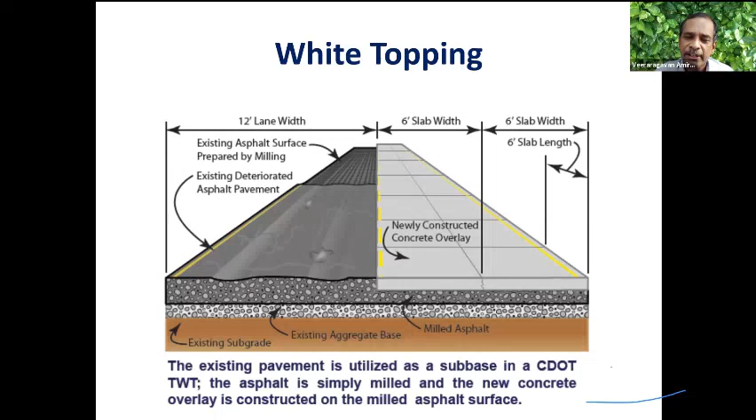White topping, we have brought in the importance of white topping in urban roads. When the road is bad, or it's a bituminous pavement, I can construct a white top pavement. Thicknesses can vary, it can be conventional white topping, thin white topping, or ultra thin white topping. So definitely for sustainable road infrastructure, white topping is going to be the order. Mechanistic analysis suggests the load stresses depend upon joint spacing. So the rule of thumb is that thicker pavement means larger panel size.

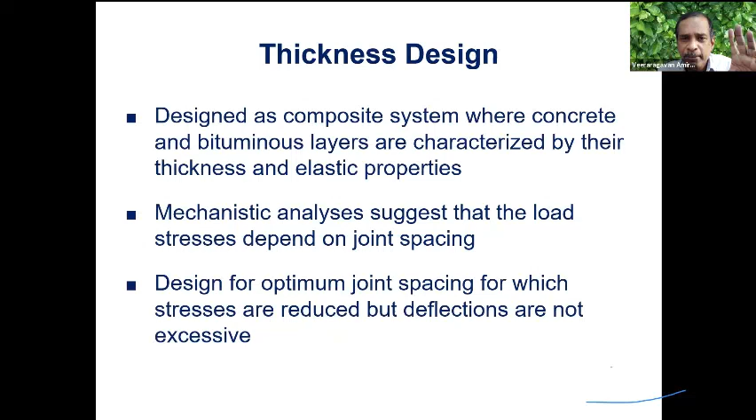Thinner pavement, smaller panel size, so stresses are being transmitted directly, and the design approach is different. There is no slab action, with the slab size becoming lesser.

You'll find that there is an optimal thickness based on life cycle cost. The lower thickness is not the one that will have a lower life cycle cost. Initial cost may be lower, but maintenance cost can be higher. The one with an optimal thickness will have a lower maintenance cost. Again, it's your role to come out with an optimal thickness.

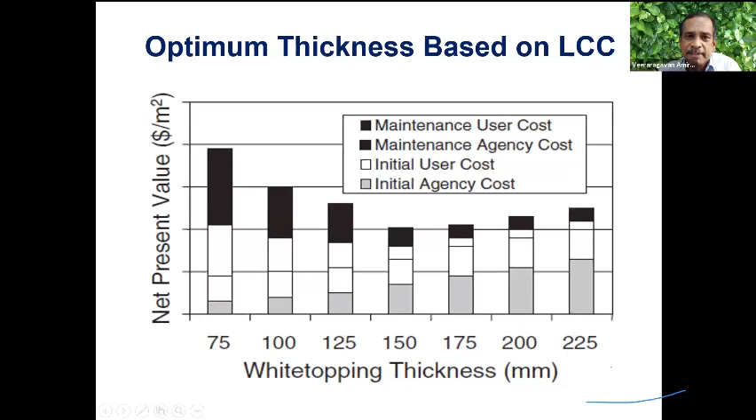Optimal joint spacing has to be worked out. Again, we should look at green highways - use of warm mix asphalt, reducing the production temperature of the mix, environmental management, use of locally available material, natural cut slopes, and recycled material.

Again, I think we should look in terms of storing the water, saving the water from the pavement - a rainwater harvesting approach should be adopted. I think environmental and water resource engineers should help us. Long-lasting pavement with lower life cycle cost is going to be the future.

So to conclude, what we need is lab and field studies on new materials, alternate materials, and translate theory to practice. You should consider the constructability issue.

In a lab, you may take 1 kg of soil, 5 kg of soil, exactly pour 65 grams, you can pour 65 ml of water, mix it by hand. But when you go to the site, you may construct 1 lakh cubic meter of soil to be compacted. Where is the OMC? How will the density vary? How does it influence the performance? So you have to translate theory to practice.

We need to construct test tracks using alternate materials. You should be able to instrument these pavement sections - that's where interdisciplinary research plays an important role. Predict the performance. Consider the constructability issues.

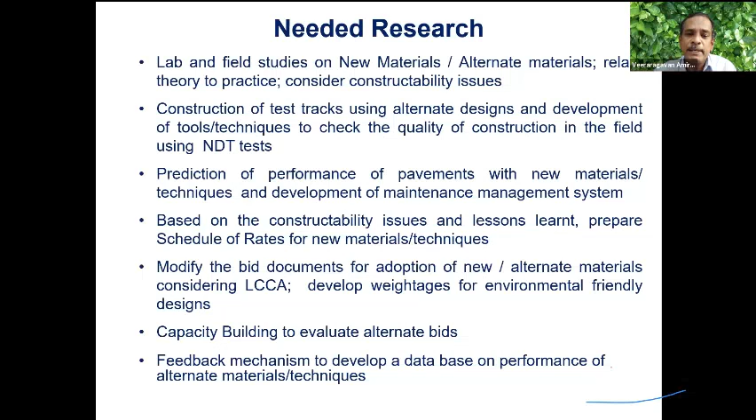Bid documents should consider the environmental benefits. We have to improve the capacity of the agencies to evaluate alternate bids. We need a feedback mechanism on whether alternate technologies are working or not.

So finally, to summarize, the future for sustainable road infrastructure is use of new materials, alternate materials, because we don't have the luxury of adopting the conventional approach. I think it's time that we teach these technologies, materials, characterization to our students.

When you have new materials and new technologies, the design approach has to change. The material performance will change, so your design approach will be different. So alternate design for new materials is going to be a challenge, again an area for research.

We need accelerated construction. We want to construct nearly 40 to 50 lane kilometers in a day. We want to go faster. How do you do that? Therein, precast construction definitely will play a role.

There are technologies for preventive maintenance which can extend the life of the pavement. What technology, what material, how much is the extended life, what are the cost implications - again an area for research.

Whatever we do, we have to evaluate the performance in the field. Which technology to be adopted to evaluate? There are a number of equipment available to evaluate the performance, structural condition and functional condition. When you use different equipment, there's a need for harmonization of different equipment.

So there is again another area for research for sustainability - looking at which equipment to use, how many times to measure the performance, how do you predict the performance and relate your predicted performance with the observed performance. Only then is theory translated to practice. You should be able to work out the life cycle cost and also work out the environmental benefits because of this sustainable technology.

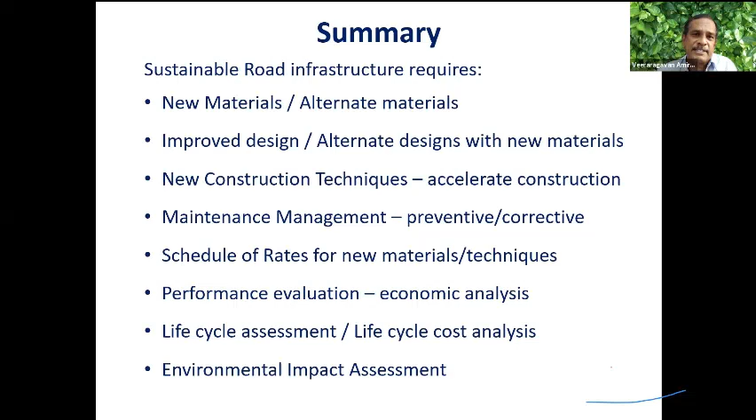I think it's time that you should make the world more beautiful. You should leave the world more beautiful than what you found when you were born. Then you have done some service to existence.

I feel all of us should work together to bring sustainability in construction, but the issue is that it's impossible to make sustainable environmental changes unless there's a change in people's behavior, values, and philosophy of life. So first, you should change yourself. You should accept the new materials, accept the new technologies. You have to prove that they work, that they are sustainable and long-lasting. If we can successfully accept the changes, definitely we can bring in sustainable infrastructure.